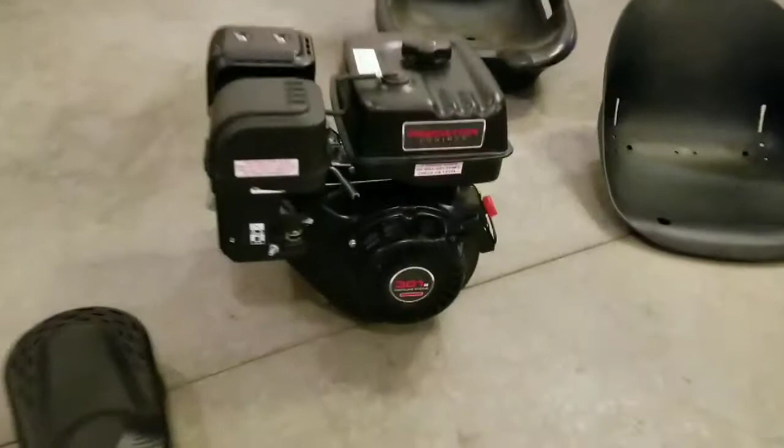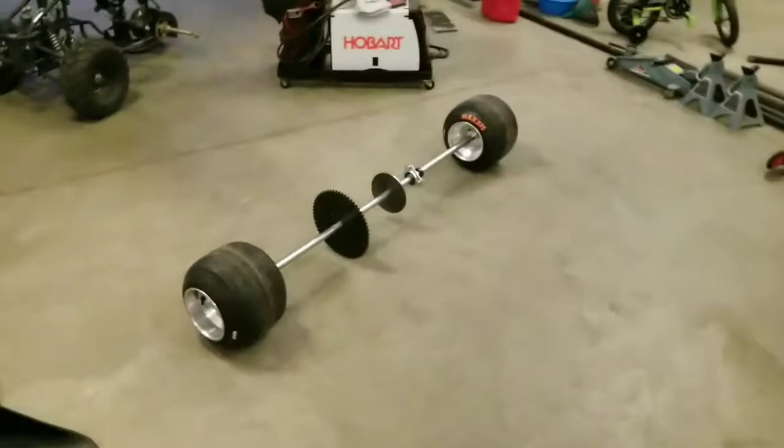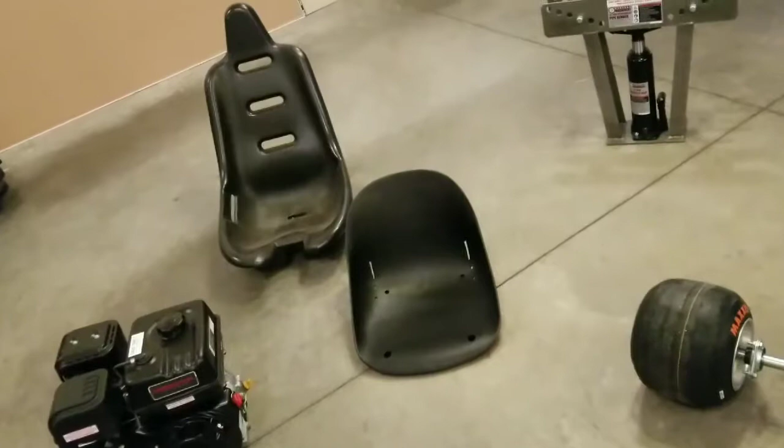Gonna start out with this here 301cc Predator motor with the torque converter on it. This here live axle kit from gopowersports.com. We'll pick one of those two seats, not sure which one yet. Play around with it a little bit and see which one works the best.

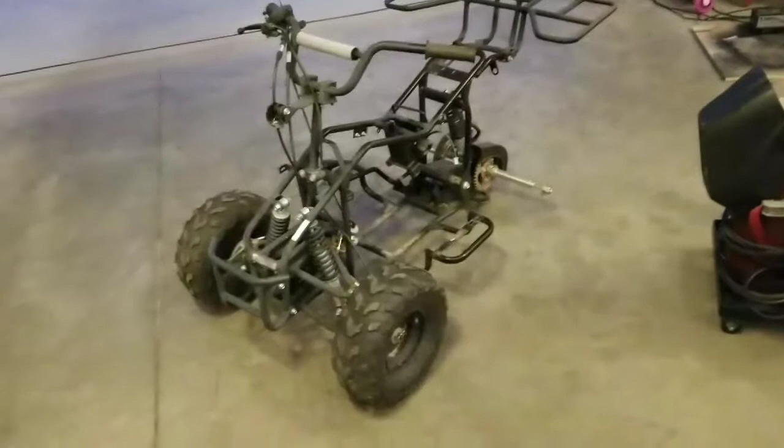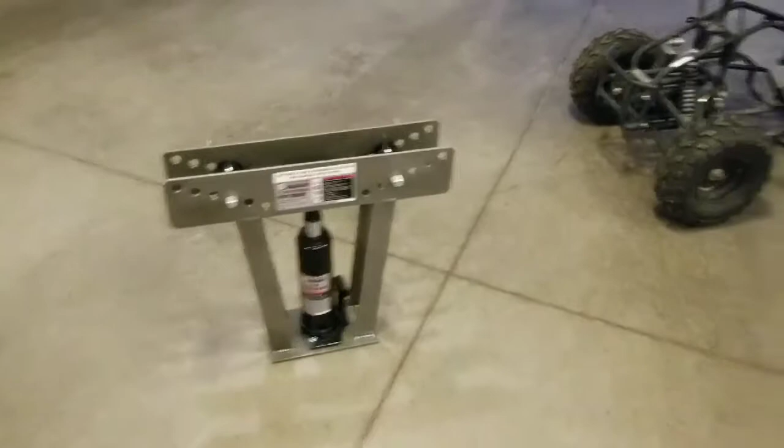The steering mechanism from this here youth quad frame, modified of course to fit, using this here Harbor Freight pipe bender and my little 110 welder. We'll see how it goes here. Let's get started.

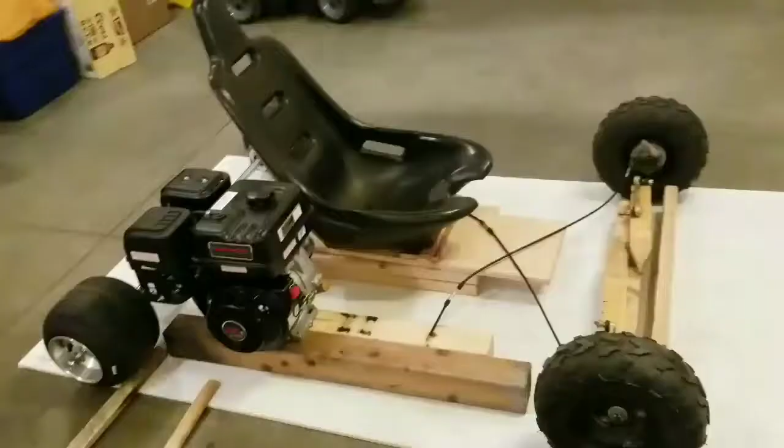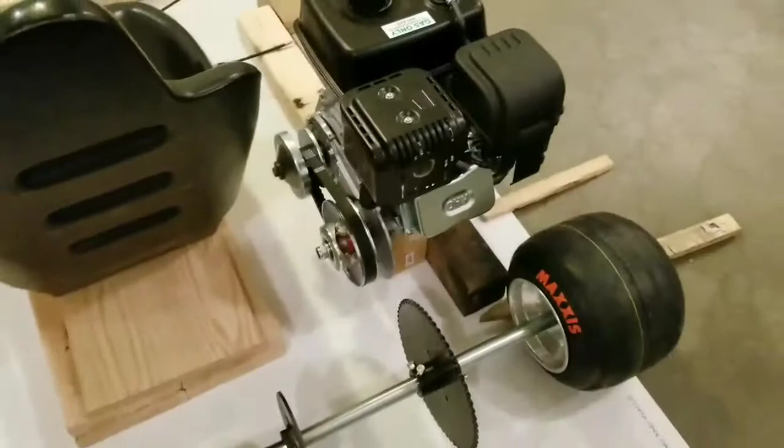So here I got about the footprint of the thing, where the wheels are gonna sit, where the axle's gonna sit, how the seat's gonna be oriented. I'm gonna try the smaller torque converter on there. I think it might be too small for this 8 horse motor, but we'll try it. If it works, if not, I'll have to get a bigger one, so I kind of compensated for that. Left the axle back a little bit in case I want to put a bigger torque converter on it.

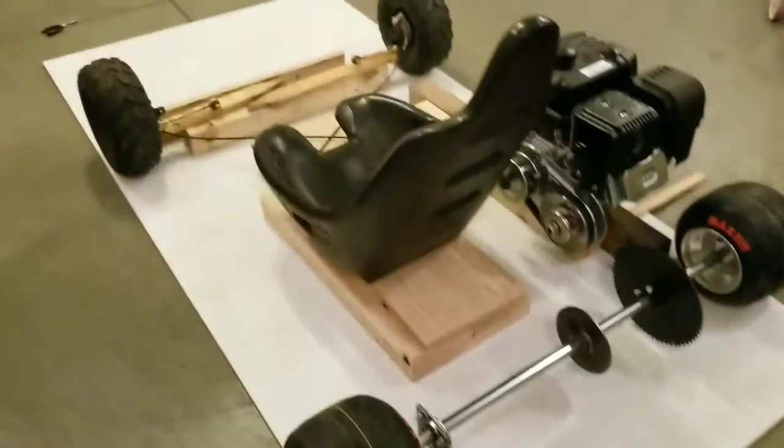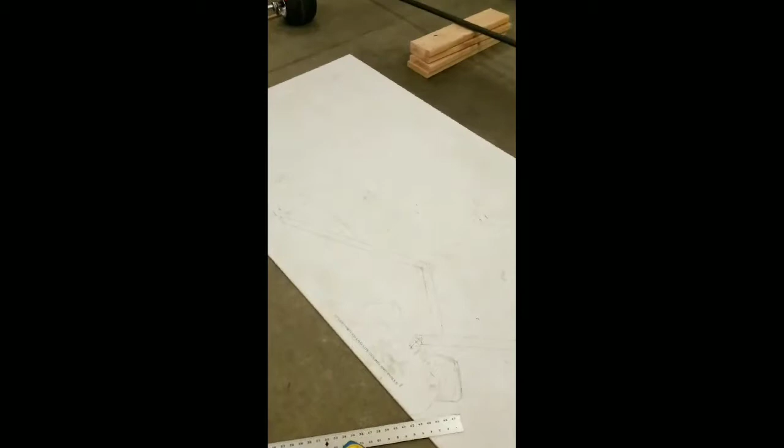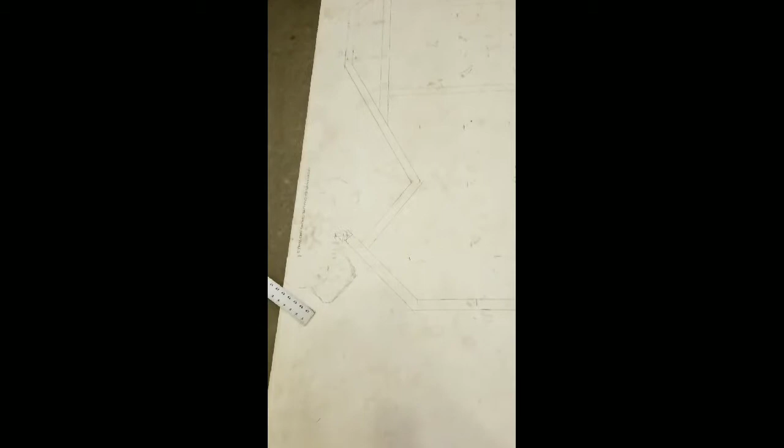So I suppose I'm going to start drawing on the sheetrock here, making up a frame. See what I can come up with here. Alright, so I took all my measurements, drew out where everything needed to be, where the seat mounts needed to be. I don't know if you can see this very good. Where the motor mounts needed to be. And then I just kind of drew my lines from there. All around the corners, they're not going to be welded joints, they'll be bent. But yeah, that's it for now, I suppose.

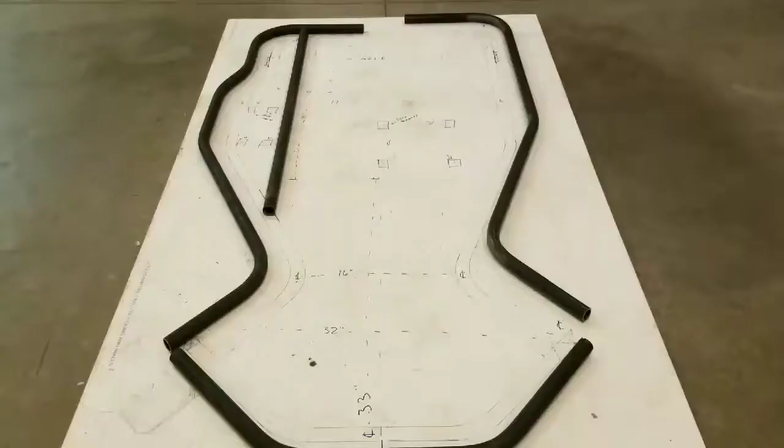Well, here's what I've got so far. Couple pieces bent up. Tubing bender over there worked pretty good. Didn't really have any problems with it. Heard all kinds of reviews about it, saying it kinks pipes and stuff, but I guess I never had a problem with it. Turned out pretty decent.

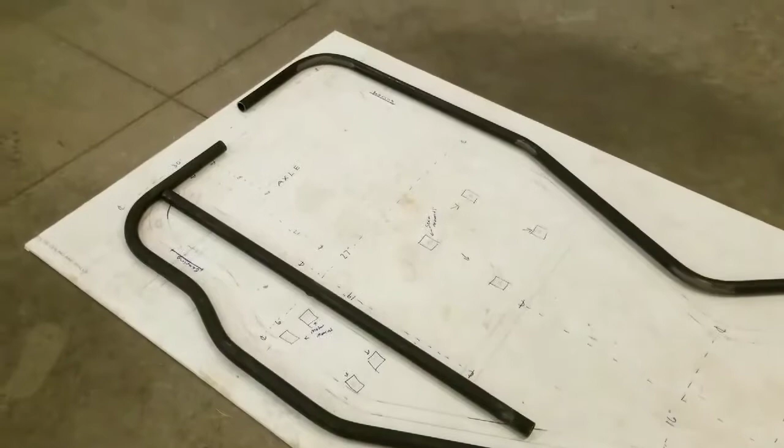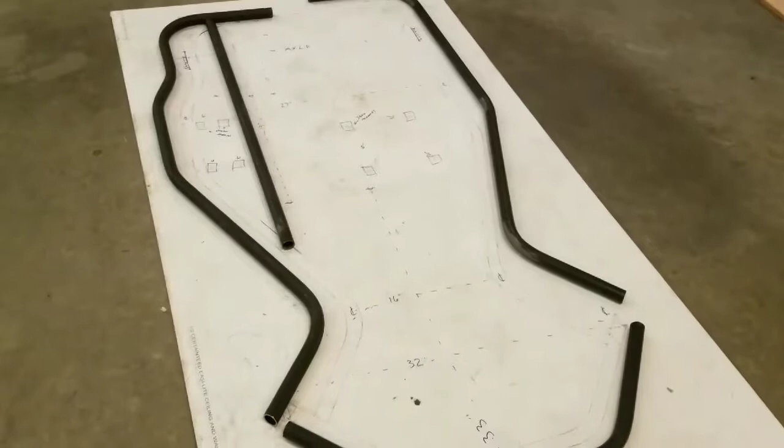Bent it out of 1-inch Schedule 40 steel. Seen a bunch of these being made with 3/4, but I decided since I've got the 301cc, I shouldn't have any lack of torque. Put a little extra weight into it for a little more rigid frame, but just got to do some grinding so they fit together well. Cut a couple more pieces and tack it together.

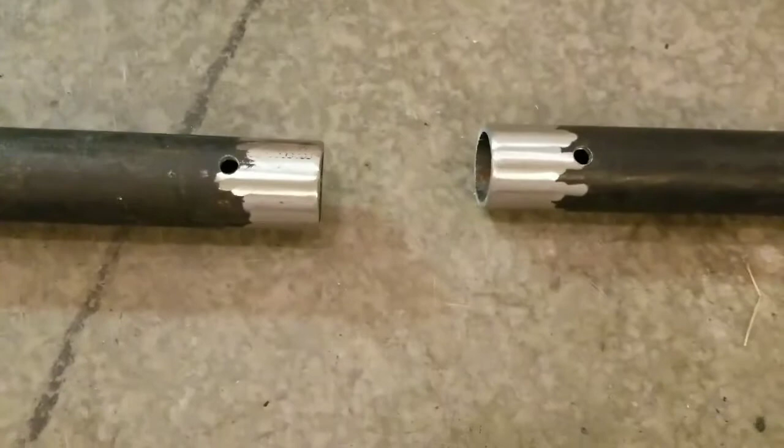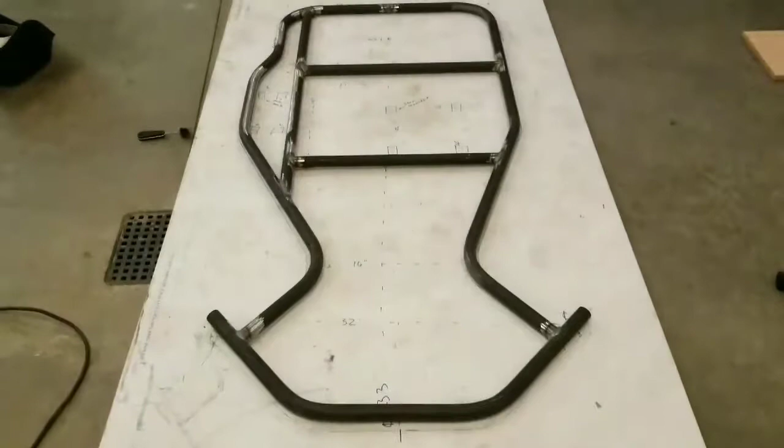So here I'm about to tack these couple pieces together. I'm going to take that little piece and weld it in between there, a little extra strength, and then come down to this bottom piece here. Well, this is pretty much the frame. It's about all that it's getting. Next thing, probably the motor mount, bearing mounts, and then the seat after that.

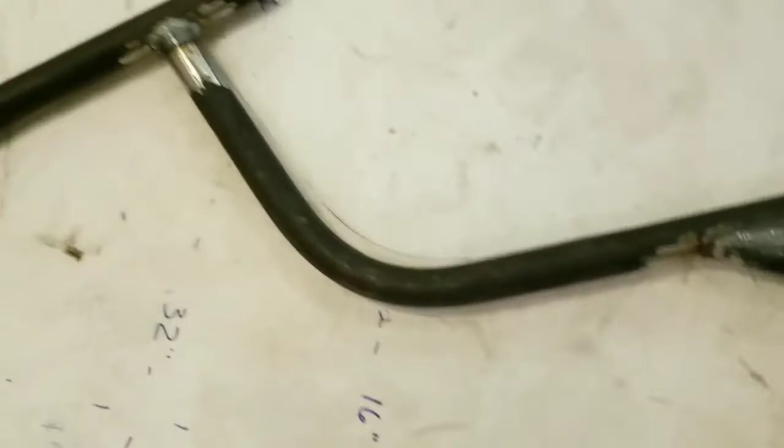So here I'd say I've got a finished frame for the most part. Motor mounts on. Just gotta drill some holes, slot them out for the motor, drill a couple holes for the seat, get the bearing mounts on, and the spindles.

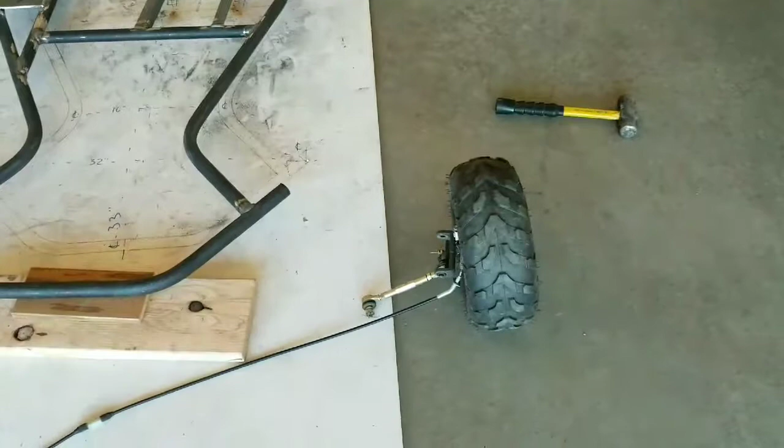I want to use these that came off the four-wheeler, but they're at a stupid angle. It's going to be kind of hard to orient those right. The only reason I want to use those is because they got front brakes. That's really nice. Maybe I'll try to make it work somehow. I don't know. Different tires on the rims for sure. Those are kind of ugly. They don't really fit the whole theme of the go-kart, but mount some bearings, I guess, and we'll see what happens after that.

So here's where we're at so far. Frame is done. The bearing mounts are on. Motor mount holes are drilled and slotted. I got the seat brackets fabricated. This is probably as far as I'm gonna get for this video. As you can tell, my first YouTube video, so it is what it is.

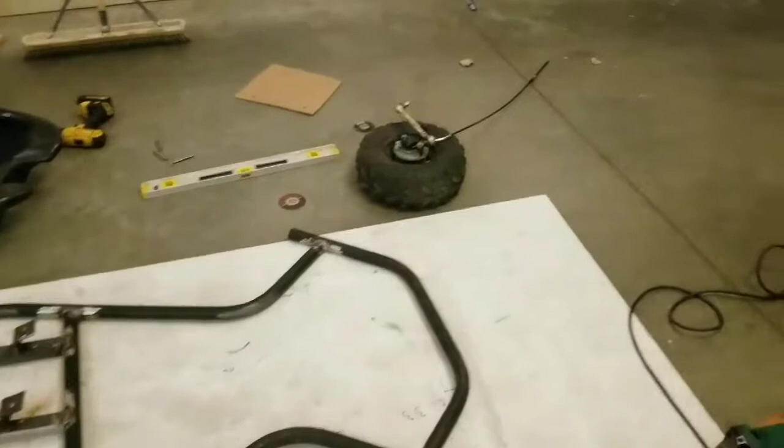Still not sure about the tires, what I'm gonna do with those, if I'm gonna use those or buy new spindles, I don't know yet. But I'll probably bolt up the axle, get the motor mounted, put the seat on, see what that all looks like, and then clean up my disaster of a garage.